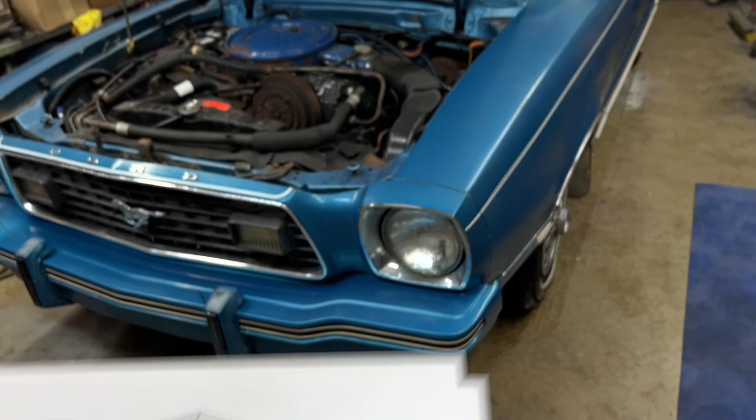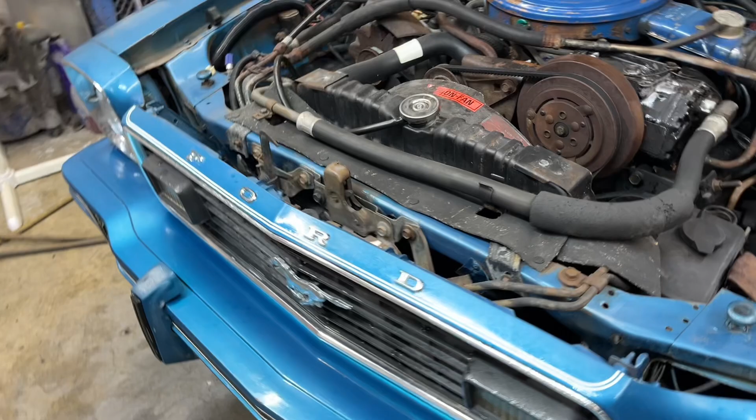Today I'm in my messy garage and I'm going to be taking a break from Project Betty while I work on my '78 Mustang II, which doesn't have a name. And I'm going to be doing a few things, mainly replacing the heater core. That is going to be a nightmare. I already know that, because the car has air conditioning.

It's a giant size heater and air conditioning box that fits underneath that whole area right up by the firewall. So I'm going to have to take a lot of this apart. I know that crash pad, this top part dash pad, comes right off of there with a few screws, and I think that whole cluster is unboltable or removable.

So I'm going to pull that back as far as I can, and I'm going to attempt to change the heater core without removing that giant box that the heater core and air conditioning evaporator are in. I'm going to try to do it in the car, and if I have to just cut the box open, I will. The reason I don't want to take it out is this air conditioning works.

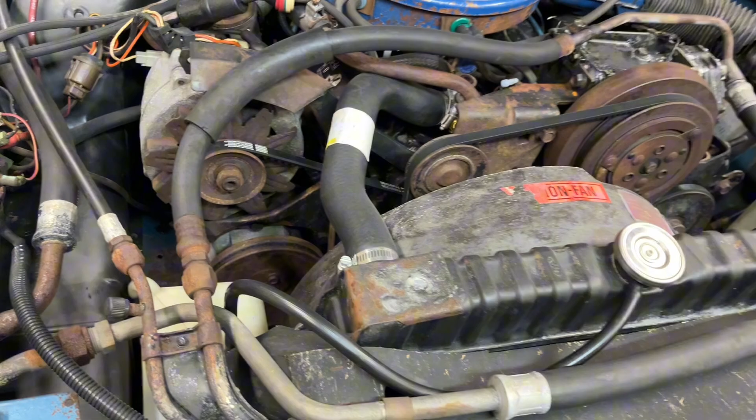Air conditioning works good. You can see everything under the hood's all original. I mean, all the vacuum hoses are there. All the other hoses, emission hoses, are there. Air pump is still on. It still functions. I mean, it's all right out of 1978. It's a 2.8 liter V6, by the way. It may look like a 302, but it's not. So

there's other things that I'm going to do at the same time, like the speedometer cable needs to be lubricated because it makes a hell of a racket as it spins around inside there. And I got a couple burned out light bulbs, and thinking about raising the seats because they are really low, and I'm old and climbing out of the car is not fun because the whole car sits low. So I might raise them 1.5 or 2 inches. I have plenty of headroom.

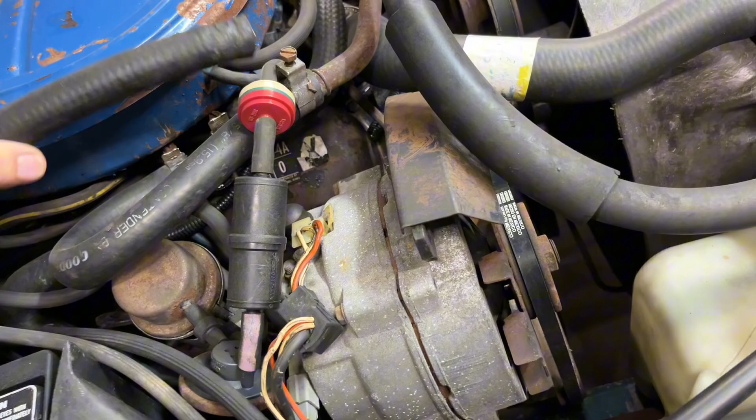I think the first thing I should do is drain the coolant, because I'm going to need to unhook the, wait a minute. They are unhooked. I'm going to need to unhook the heater hoses, but since the heater core leaked, I already have the heater hoses unhooked. And then I can worry about draining enough coolant out later to undo my loop. Because right now I just looped the heater hose. I won't have to drain all the coolant, just enough to take that apart without making a mess.

So I got the car in the garage. Just turn the heat on, turn a couple fans on because it's wet and it needs to dry off. The first step in this project for me is going to be to raise the car on jack stands. And I'm going to take the seats out of it, take the console out of it, and with the car higher, it's going to be a lot easier for me to crawl in and out of it 100 times.

The steering wheel, I don't think I have to take it all the way out, but I can loosen that and lower that as far as it'll go. And then I can start the fight with the instrument panel. I'm sure there's going to be a lot of wires, connectors, brackets, and braces, and various headaches to get that at least pulled away far enough to work back in there. I'll look into it, but if I can take that whole thing out of there, that'd be even better.

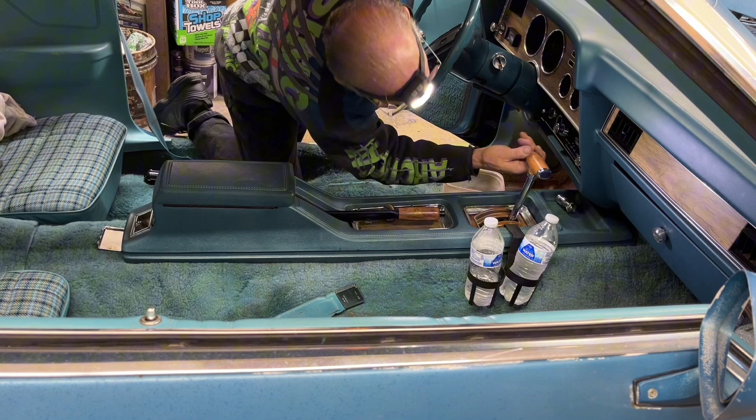Seats weren't bad. Now let's see what it takes to get the console out of there. I haven't had one of these consoles out of a car like this. I've had other consoles out, and they're normally held in with a few screws. See, I'm gonna need an Allen wrench to get the shifter thing off.

Oh, I have a hood ornament that I bought. I don't know if I'll get to it this time while it's in the garage or not, but I'm gonna put the hood ornament on.

Okay. Let's see what we got. There's probably gonna be screws underneath. I'm gonna have to take the inside of the console tray out. That might slip off this handle. These are easily removed. So, feel around here.

About this, will that pop out easy? Maybe not. Of course, oh, that chrome part will come off with the top of the console. That thing felt loose. Okay, that's good. Only got one broken tab. Let's see. That's screwed on. Not here. Screwed on in the back.

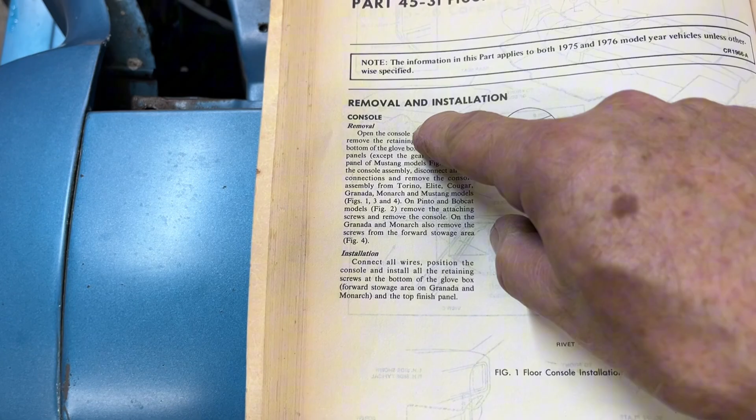And when I go to interior trim, section 45, shoved a little piece of sandpaper here to mark that. Floor console, 4531. Okay. Go here. Now, that paragraph, that's all there is to remove the console. What it tells you to do, here's the Mustang. Take out those 4 screws that hold the console to the bracket.

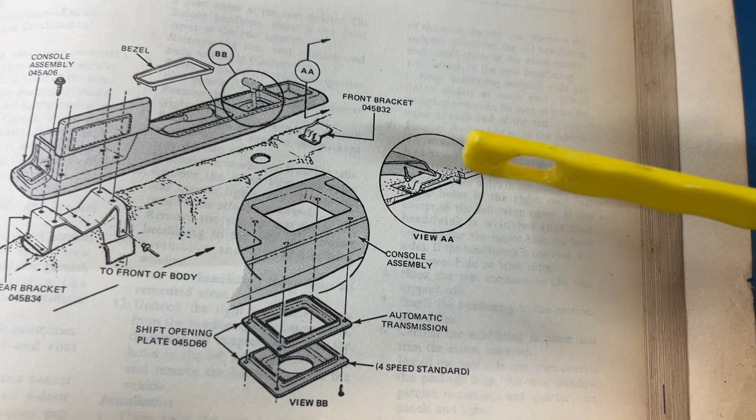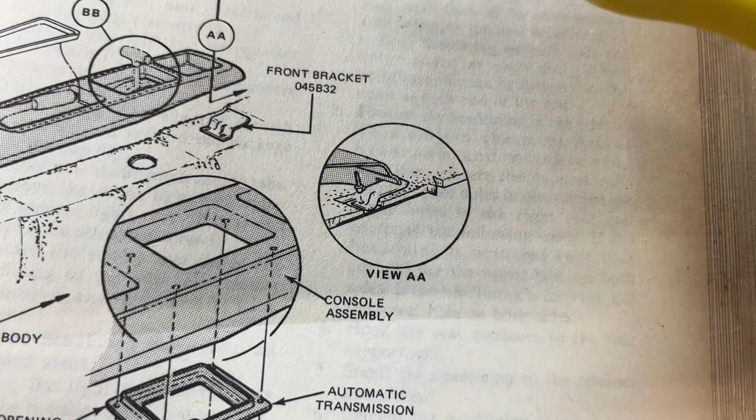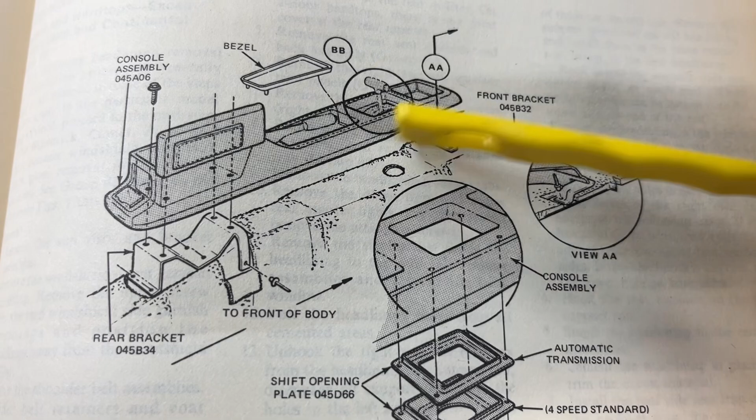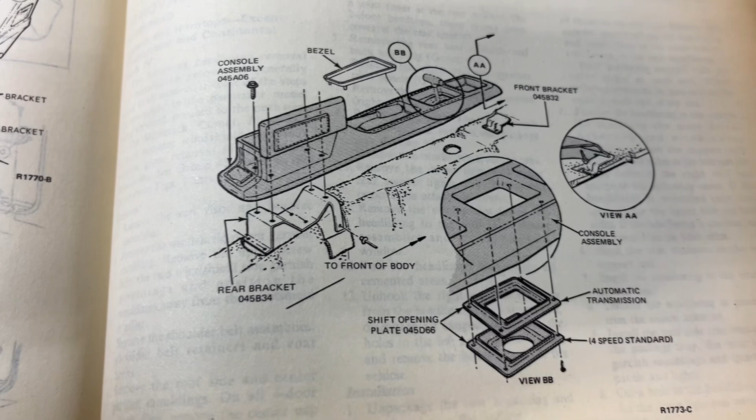And this front part, there's a little section showing through here. Shows that the steel bracket's on the floor. And the console just kind of slides into that bracket. There's the bracket. Console has a hole in it. So, doesn't say anything about removing the shifter handle. It says in the Mustang you don't have to remove the bezel. So it's looking like 4 screws and unplug the wires, lift the rear of the console, slide it forward, and it should come out of there. Let's find out if that's true.

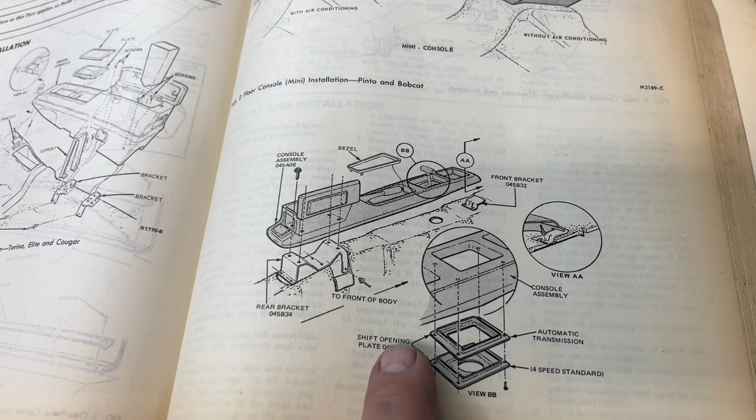I also have the Chilton's Mustang II manual, and I started looking through this, but there's no interior. It's all engine and trans. And then I look here, it's repair and tune-up guide. So this Chilton's isn't going to do me any good for the interior, but it might do me some good for other parts of the car. But for now, we're going to go by the Ford shop manual, that diagram, that paragraph, and take the console out.

Okay. Luckily, I don't have a lot of stuff in the console right now. This hat will be good enough to hold what I have in there. All right, so 4 screws. Phillips head. Where's my Phillips bit? Here it is. All right. Okay. Come on. Okay. Let's see. Does this lift up? Yes, it does. Does it slide forward? Yes, it does. Does it unhook? No.

Didn't say I had to take the ashtray out, but I think I will. All right. I'm not seeing any wiring connectors. Wow, wow. That may have been one of the easiest consoles I ever took out of a car. 4 screws. Lift up, slide forward, pull it out.

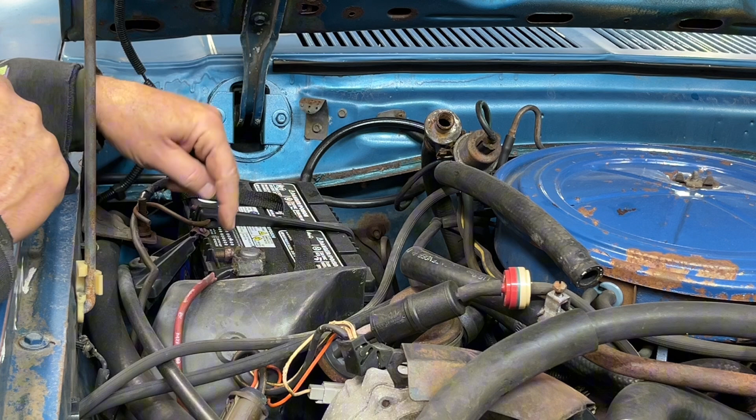Anytime you do electrical work on a car, start playing with connectors, you should unhook the battery. Now I was in there pushing that little button on the light switch, and there's a buzzer buzzing to let me know the headlights are on. And it reminded me I should just take this cable off of here. So I'm going to do that.

Huh. That one came off easy enough. I don't have to worry about losing any radio stations or anything like that that you would in a modern car, because this has got an old school radio with the dial tuning. So, battery's unhooked. Now I can get back to the fight.

All right, I crawled under there, pushed on that button a long time. My fingers are hurting, I can't get much in there, but I was able to take a dime, get in there, and use that to push that button. That button got pushed as far in as it's going. That's not coming off. Now it will.

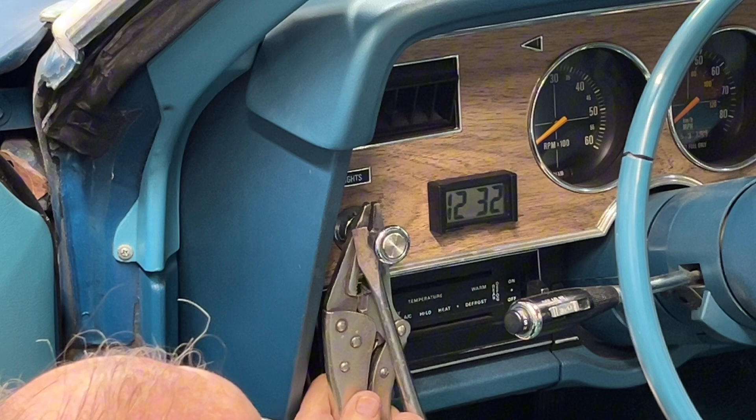I clamped vice grips onto the shaft. I got me an antique, old school, ultra heavy duty screwdriver. Anyone would do, but I like this thing. I went in behind the knob and kind of pushed against the vice grips, and that knob is coming off. Look at that. Knob is off. So

you can unscrew this bezel. See, the whole thing is they want you to push that button, yank this knob and shaft out of the switch, and then you can take this bezel off and take the rest of the car apart. A trick or a shortcut is to pull the knob off the shaft. I can take this bezel off. That's only held on with a few screws.

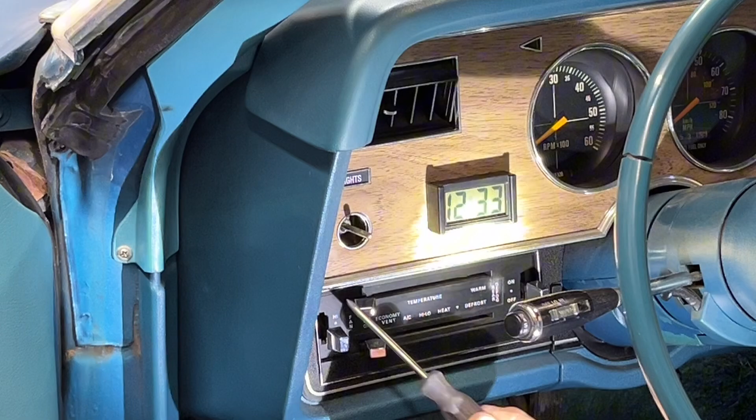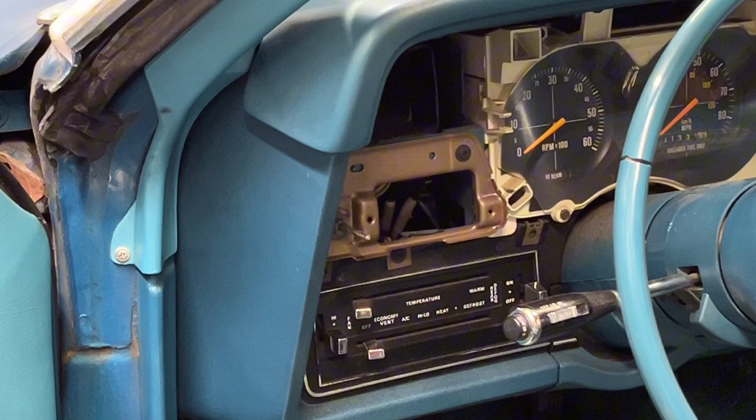And then give me a headlight on here so I can see what I'm doing. Phillips head. Looks like there's only 7 screws that hold this bezel. Throwing all the screws in one container. We'll figure out what goes where later. Alright, so easy. Came right out. Put it in the back seat. And I'll pull that light switch thing out of there and show you the button I was fighting with.

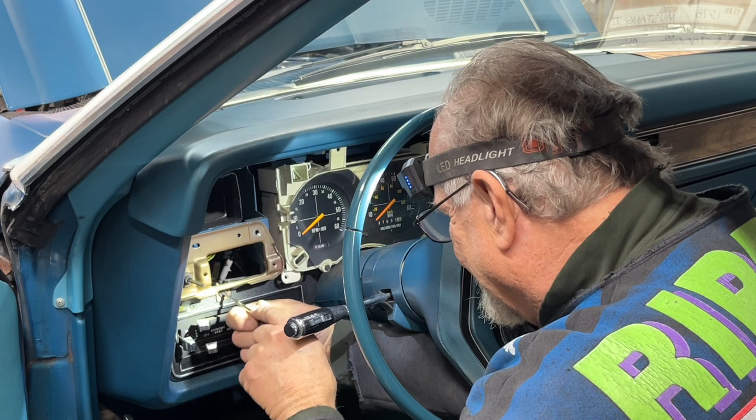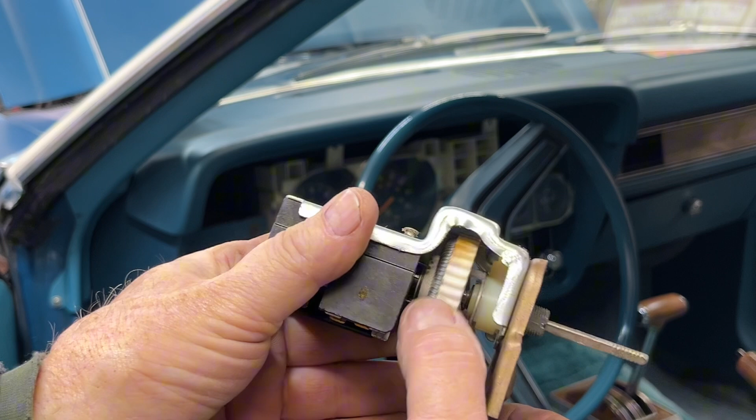I was thinking back, I don't recall ever having that button work as it's supposed to. Okay. Alright. Let me twist around here and show you this. Here's the light switch. This is like the rheostat to dim the lights. That button's right here, this spring-loaded button. You're supposed to push that in and pull this rod out of here. Now I pushed that in as far as it would go, held it as much as I could, and that's just not coming out of there.

It's a nice concept, but in my opinion, they could have come up with something better, or at least have a button that works. This one's not. Alright, that's enough crying.

So, can I reach through here? Get that speedometer cable. About up this way. Well, I know I need to take this trim panel off the bottom here to get the steering column to come down. Do that. This little guy here. Back seat with the rest of it. Big honking bracket here. Looks like that's going to have to come off before I can drop the steering column. That's 9/16.

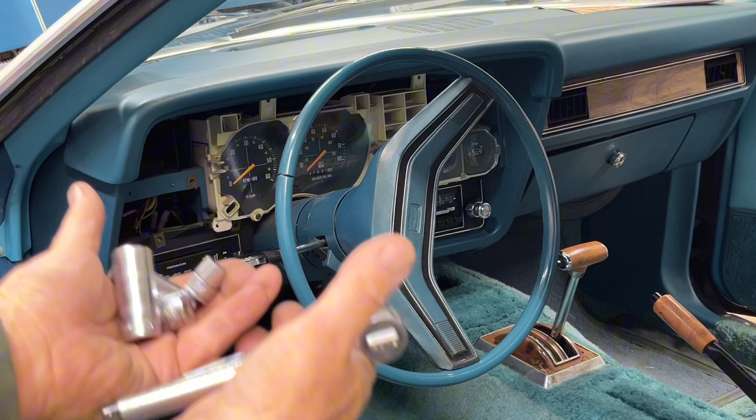And do you think that's going to be enough? I don't think so, Tim. Alright.

See, these here will be easy to get to. That one wasn't that tight. Okay. There's 2 down. Back here, I know I'm going to need the shallow socket. I have to go get a ratchet wrench. I know you can't see what I'm doing, but it'd be too hard to get you guys down in here with me. And of course, there's something mounted to the plate with a big electrical connector on it.

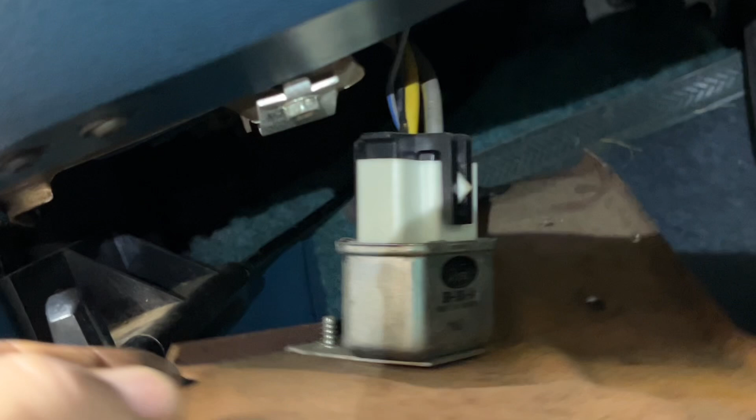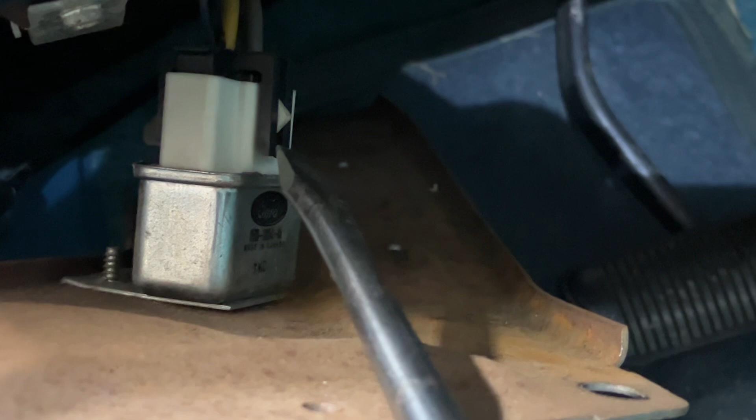It's one of those typical, whoops, I just kicked you guys. One of those typical connectors. Here, let me see if I can take you for a little ride here. Go down in the car, I'll show you what I'm crying about. Alright, this giant plate here. It's got this big thing on it, 2 thick wires, smaller wires, but those clips, you need to spread that black part out to release the white knob. It's on both sides. They're made to snap on easy, but to get them off, they're difficult.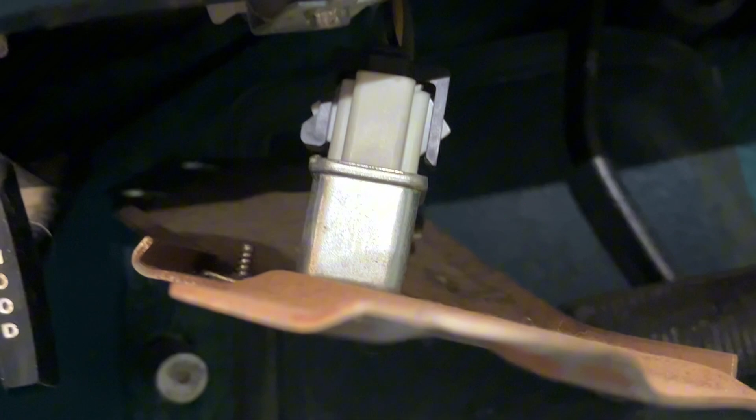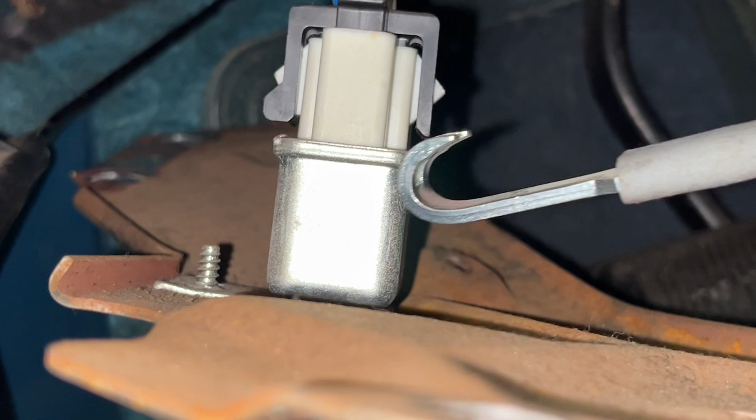And you start prying on those black tabs, they're gonna snap, because this is an old car. So somewhere I bought a tool to take those apart. Let me see if I can find it. Found it. The concept is to stick these fingers in behind that clip. Of course, is that gonna work without breaking it? I don't know. You would need 2 of them. You have to release both clips and pull that at the same time. What was that, 3 hands, 3 arms, 2 people? I don't know.

I hear you guys. Shut up and just do it.

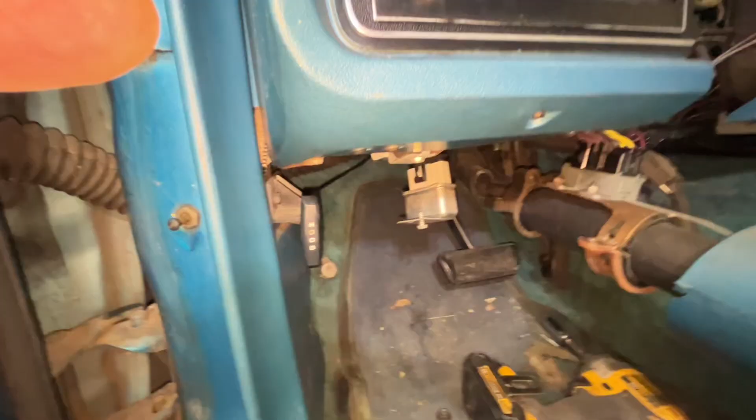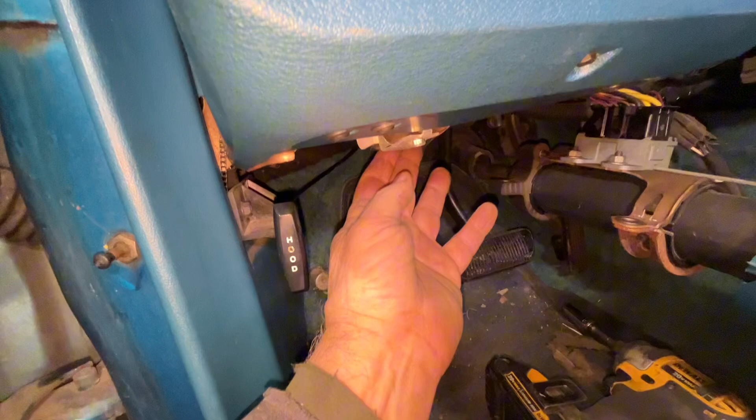I will. Some of the more astute viewers would have noticed while I was struggling to figure out how to get that connector apart, that thing was only held by one screw. So I took that screw out, whatever this box is, and it can just stay up there. I don't have to worry about unhooking it.

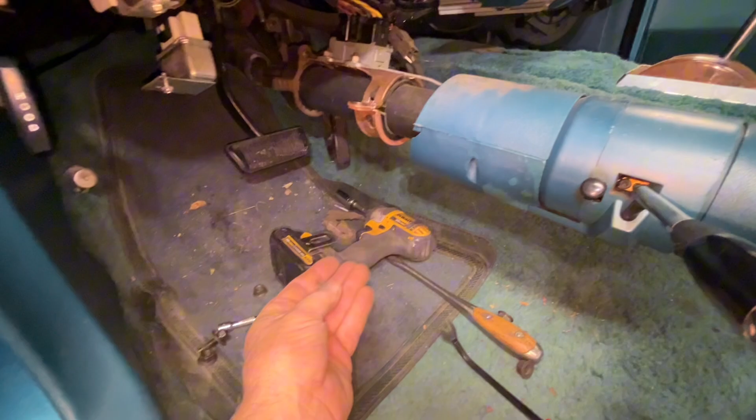I dropped the steering column. That was very easy. It's got 4 nuts that go on to these studs that hang down. There's 4 of them. Studs go through holes in the bracket. Nuts on them, very easy to drop it down.

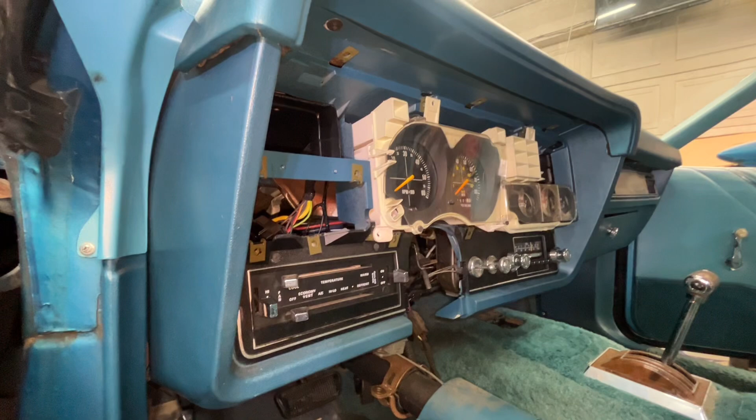I dropped the steering column hoping I could have enough room to get into the back of the speedometer so I could take that housing or push the tab and pull the cable out of the speedometer housing. The bracket's in the way, so I'm gonna climb on the other side of the car and see if I can reach in behind the cluster from that side to get it out.

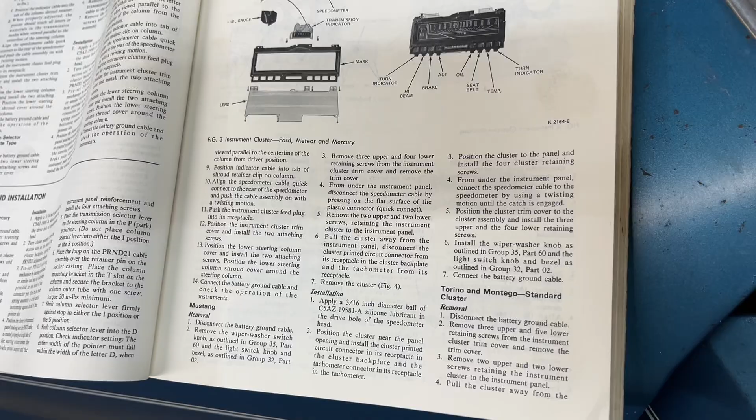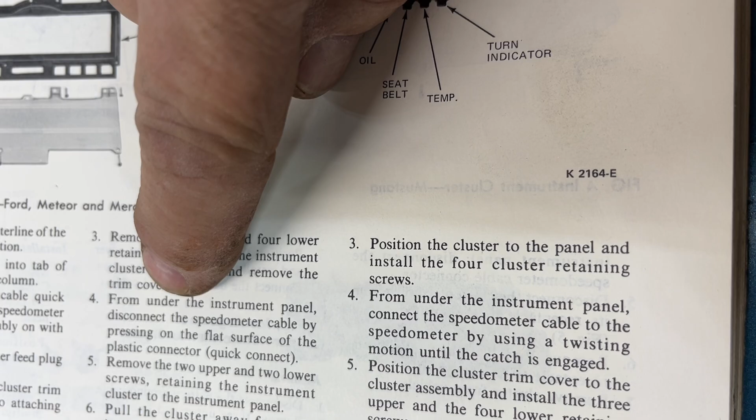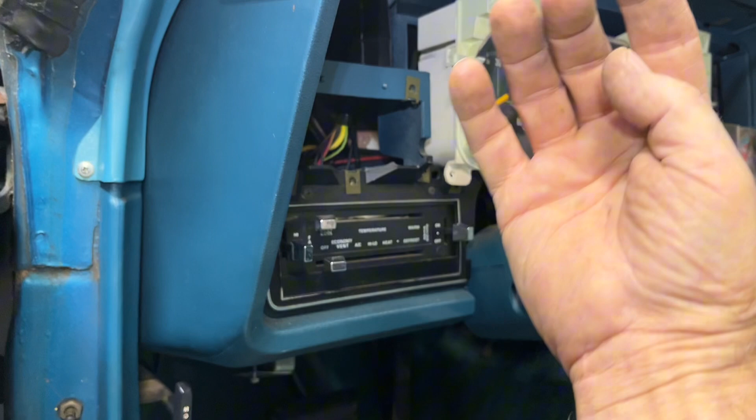When all else fails, read the directions. Shop manual for Mustang. It tells you to, from under the instrument panel, disconnect the speedometer cable by pressing on the flat surface, blah, blah. Well, that's what I was trying to do. But then I came to the car. I don't know why I didn't try this earlier. I reached up on the right side of the column, went right up in there, pushed the little doohickey, and unhooked the cable. Sometimes it helps to read the directions. Not always, but sometimes.

I've been fighting with this for a while, trying to take things apart. I got the pad assembly off, no problem. Speaker came out, a little bit of problem. Glove box, total pain in the butt to get out of there. It was like 2 pieces, and they had to come apart before you could take it out. Nightmare. Now I'm trying to get the ducting out. Defroster duct looks like that might not be too bad. But the ducts for the vents, that's a battle.

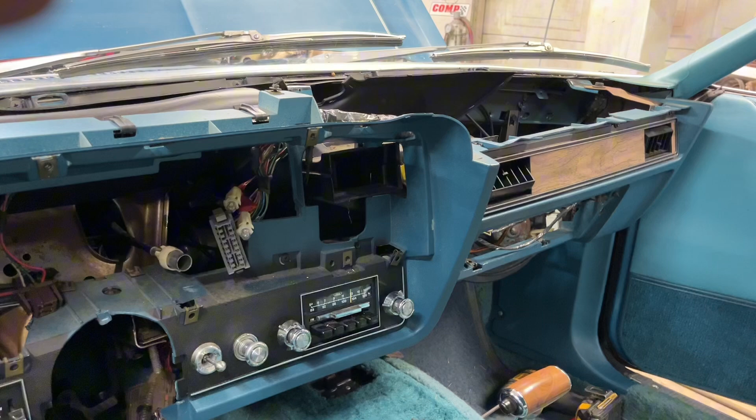There's a screw back there, like in that area, that you can't get to easily, and I need to take a break. I've been out here for too long fighting with this, playing contortionist, crawling around, trying to reach screws from different angles. I need a break. So I think I'm gonna go in the house and have a cup of coffee and take a break.

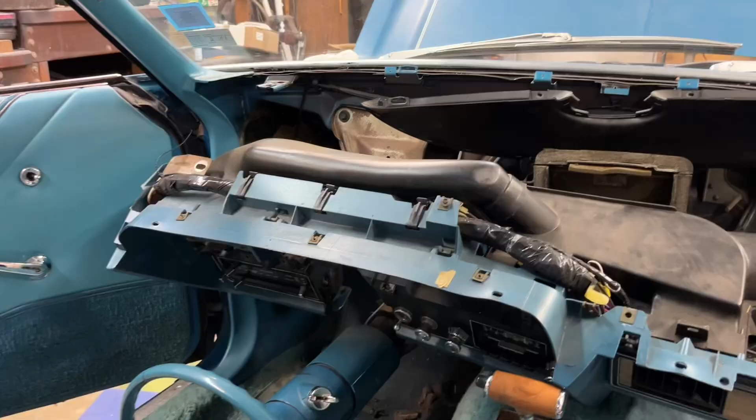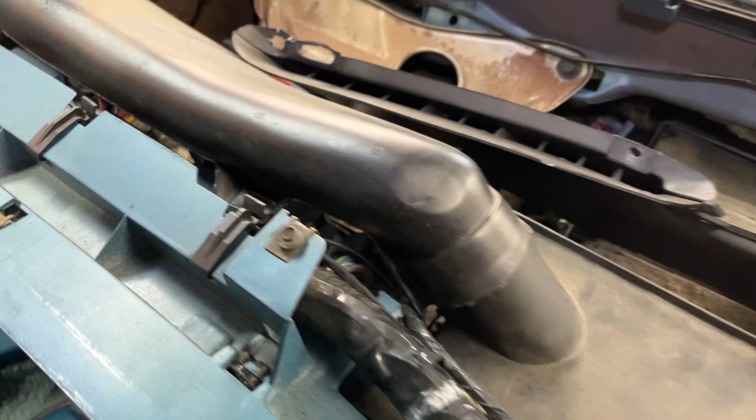I was able to unbolt the dash and pull it away from the car. The defroster duct can now come out of there and move off the side. All right, there's a duct here that goes to these air conditioning vents. Got that screw off, so that duct comes off.

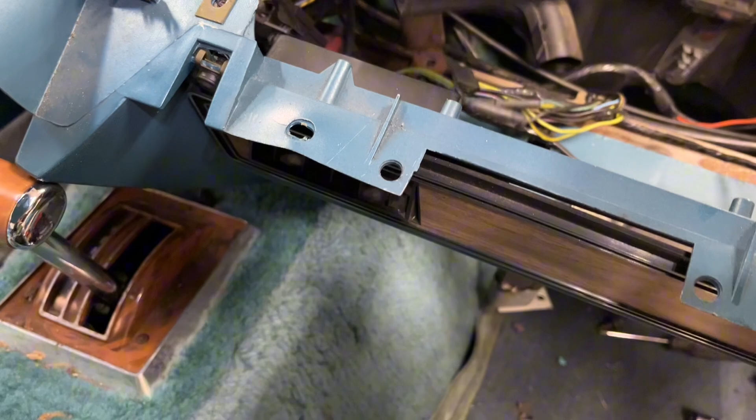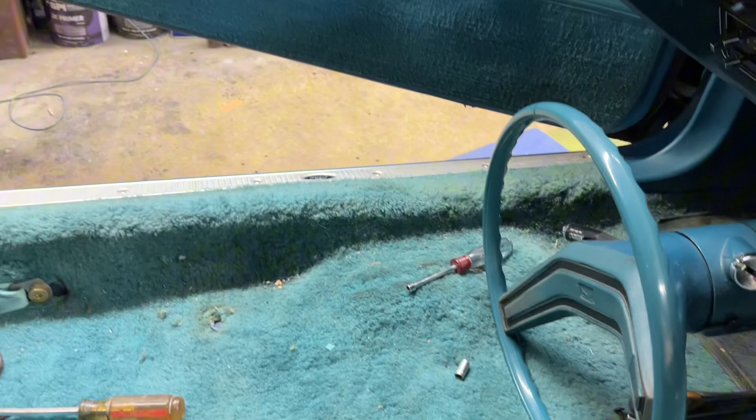The center duct is the one that was giving me all the trouble because there's a screw back in there. Yank it out of here and I'll show you this. Goes in that bracket, the back side of this thing, and you can't get to it. That was a real pain. Okay, just these defroster ducts. Let me switch hands here.

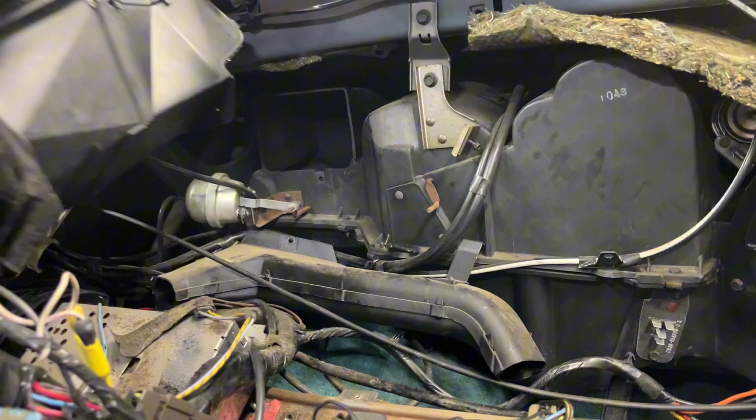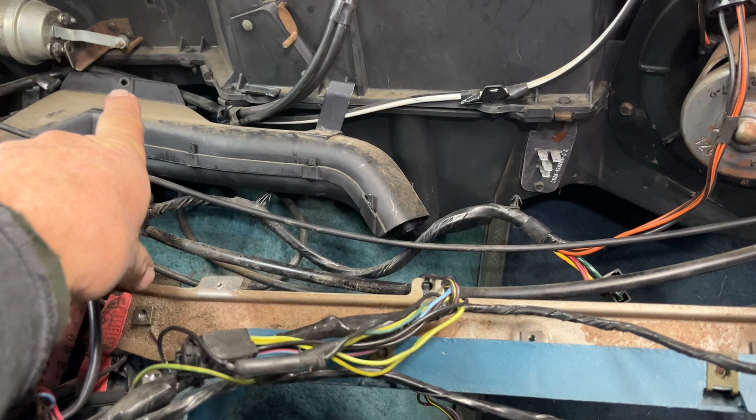It's still held on to the car with a vacuum hose that doesn't want to come free, but I can set it off to the side. There's another duct here, had a screw holding it in, and another screw over here. That's like the floor duct.

That came out. This little guy here is held on with a couple studs and nuts and one of those little spring clips that go on there. It's like a one-way clip. I finally got that to come off. Of course, the clip went into Neverland. I don't know where it went.

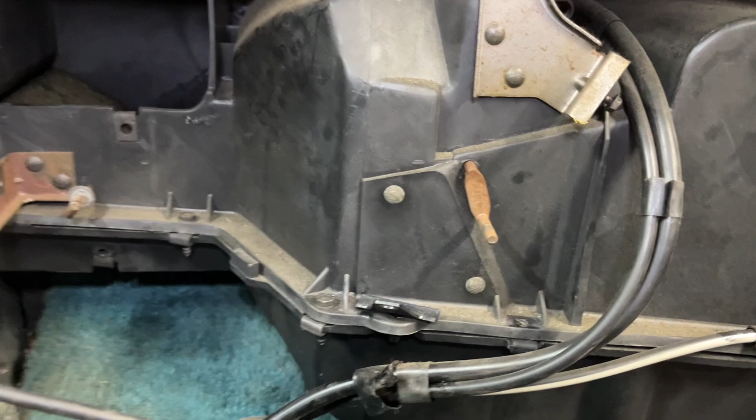I've been studying this for a while. I don't think I'm going to be able to accomplish what I thought I could. I was really hoping I could change the heater core without removing that whole giant box. This hump here is where the evaporator for the air conditioning is, and the heater core is in behind that other hump. The problem is this goes way back in there, and there's some screws that go vertically into the two halves, like that one there, and they go all around the edges. I can't get back in there to get those.

Now I was thinking, well, I could just cut the box apart, get the heater core out of there, and glue it back together or do something with it, but I'm second guessing that. I think I'm just gonna have to bow down and take the thing out and do it correctly.

I'm gonna call this the end of this video, part one of me putting a heater core in a 78 Mustang II that has air conditioning. I was really hoping I could do it without having to remove that giant box, but it's just not gonna happen. I did accomplish a lot. I made a huge mess. Got a back seat full of parts. I have tools all over the car. Steering wheel laying on the floor. And it's all exposed and ready to come out of there. But that's going to be the end of part one.